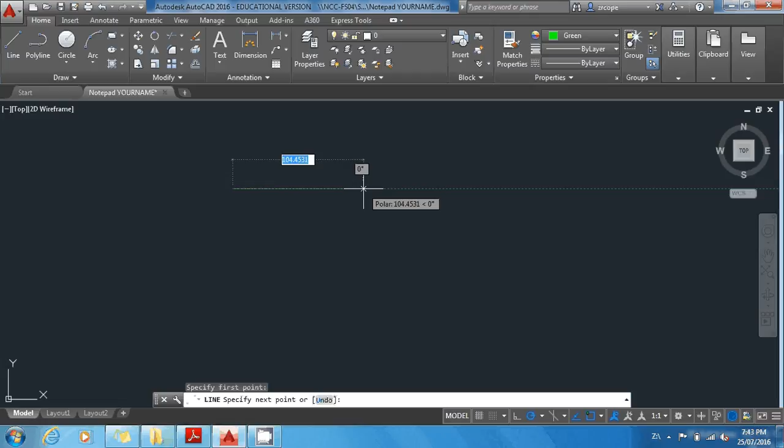We're going to start with a line. We're going to go over 230. Okay, it's green. We don't want that to happen, so let's delete that. Let's change that back to by layer. There you go. 230 by 120 by 230, and click to connect. Then hit enter.

Okay, the next task that we want to do is draw these blue lines, which are our bend lines. So let's start at the left side. It's 10 and then 20. So we're going to use this tool here called offset. Once you click it, at the bottom it says the distance. Click in the box and type in the first distance. Let's check. So we need 10. 10, enter. Select the left side, move in, and click again.

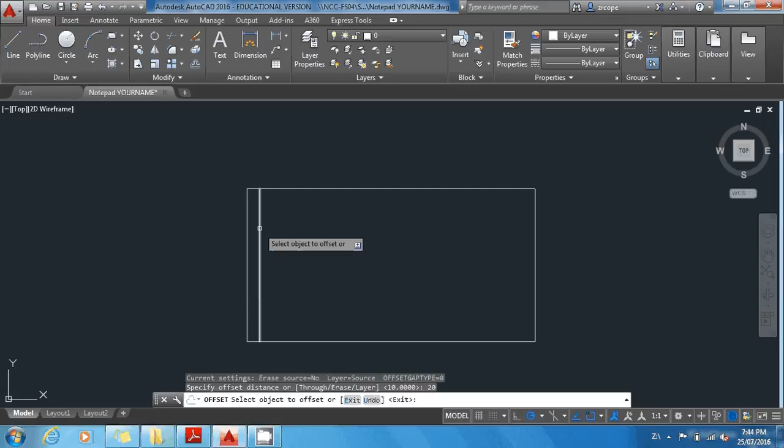Notice if I move to the left or right, I can pick what side it goes into. Okay, hit enter to finish. Let's do this again. Offset, pick the distance of 20, enter, pick the line we want to copy, and move to the left or right, and then click again. Hit enter to finish. Let's repeat again.

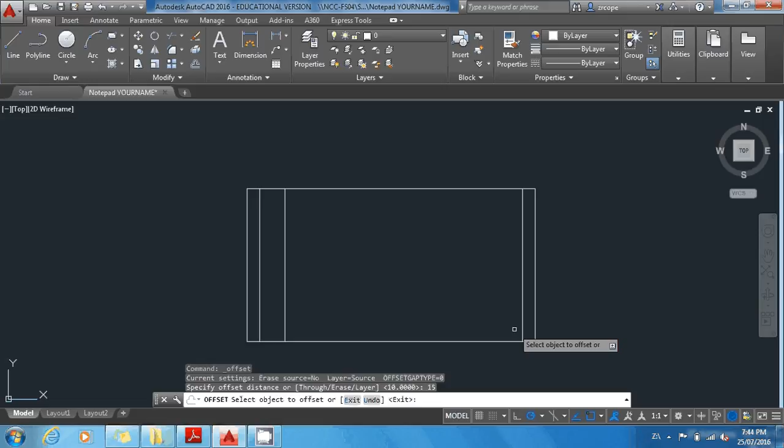On this side, we want to go 10 and 15. Offset, distance of 10, click, click again, offset, distance of 15, click, click again, then hit enter.

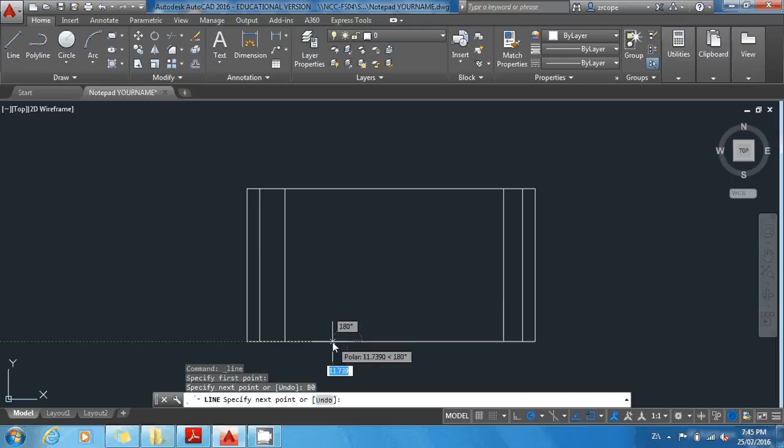Our next task is we want to curve the lines. Well, actually, let's not do that yet. Let's first make the inside piece. So this is the inside piece. So we need to go over a distance of 80 along the bottom and up a distance of 50 to get to this point. So I'm going to draw a new line. I'm going to start here. I'm going to go over a distance of 80, enter, and now my mouse is at the right spot, so I can go up a distance of 50.

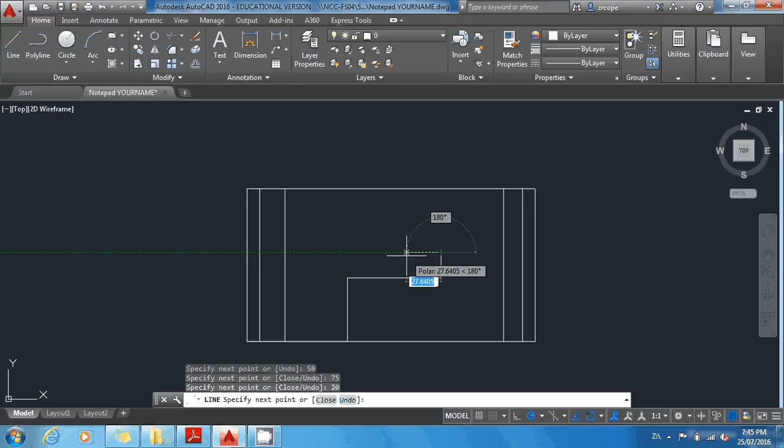Okay, now I'm going to go over a distance of 75 and up a distance of 20. So 75, go up 20, over 75, and back down. Now I can click to delete that line, and click this line and delete that line.

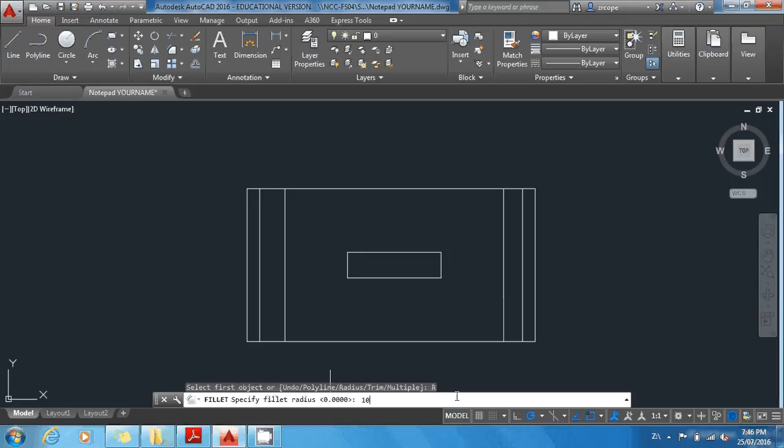Alright, let's curve the corners next. So that's going to be using the fillet tool. So the fillet tool is located here. You'll see fillet that curves corners. At the bottom, you need to specify the curve. So we click on radius and then type in a distance of 10 and hit enter. Now you have a square mouse. You can click the first line and the second line, and that curves the corner.

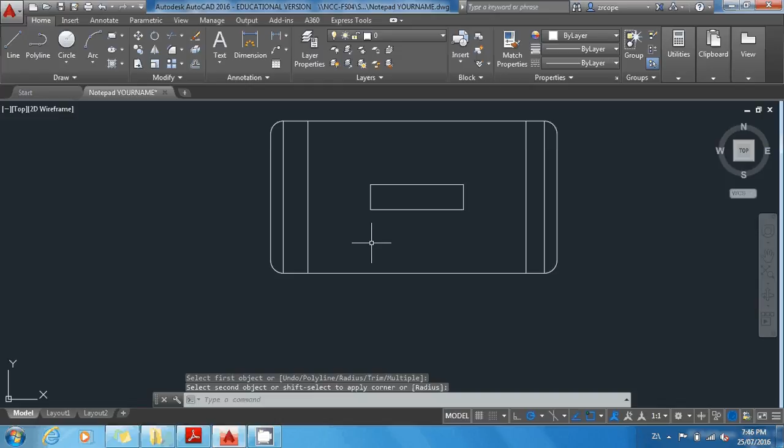So let's try again. Fillet, radius, 10, enter, click, click. Alright, we're going to repeat again. This time it remembers what you've done, so you can just keep clicking. Fillet. Okay, next task. Now I need to curve these corners. Those are a fillet of 5. Fillet, radius, 5, enter. Pick each line.

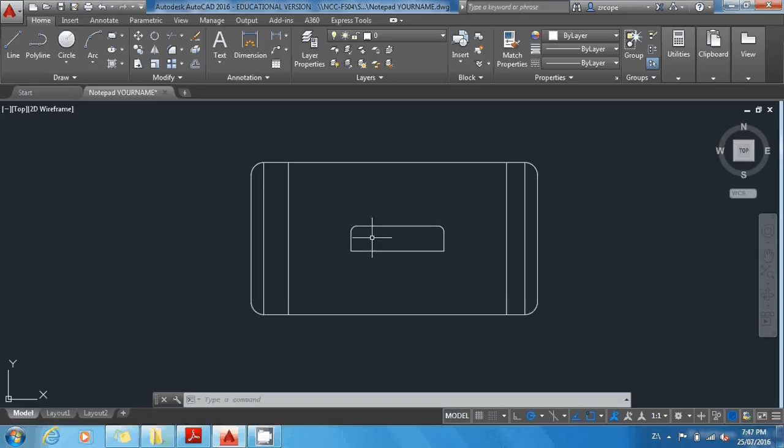Alright. Now we're going to add holes, the diameter of 4.7. Now they need to go in and up. So in 7.5, up 7.5. So we're going to start with our line tool. Start here, go in 7.5, go up 7.5, and hit enter. Okay, we're going to do the same from the other side. Over 7.5, up 7.5.

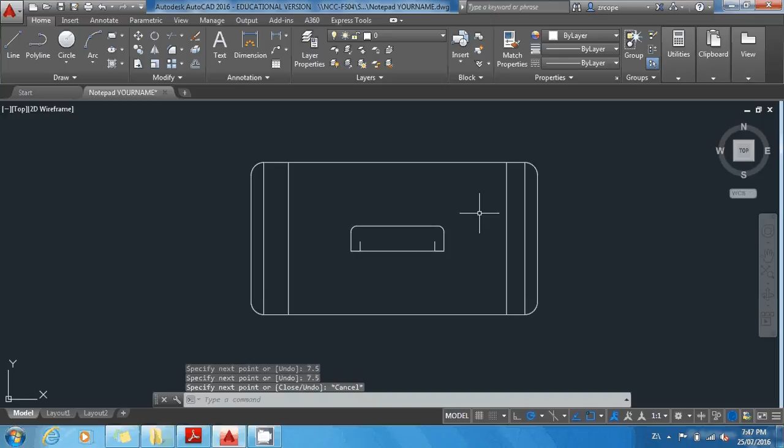Okay, then we can use circle. We want the diameter. 4.7 and hit enter. Okay, let's do that again. Click that. 4.7, enter. Okay, we can delete out our lines.

Alright, your next task now. Now what we need to do is add more circles here. So you're going to go over 52 and up 30. Line. Okay, this one's tricky. We don't have any corner. So what we can do instead, we can start in the middle. So we can go over 52 and then halfway up and halfway down. So the distance is 60. So that's 30 up, 30 down.

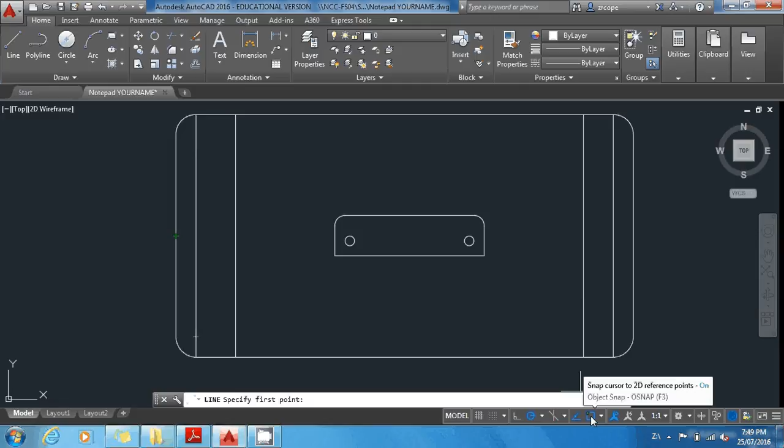Okay, to find the middle of something, which is the triangle, you need to click on the drop down arrow next to snaps and select midpoint. Make sure it's checked. Now if this is not blue, click once to turn it back blue. So it must be blue.

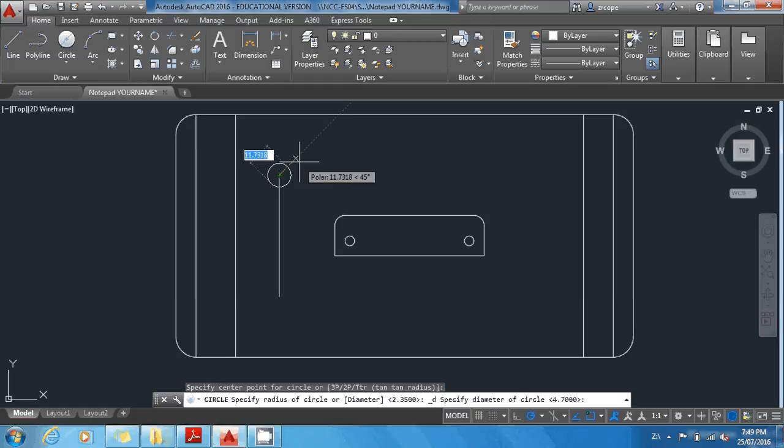Now click on the line, go over 52, hit enter, go up 30, enter, down 30, hit enter, delete this line out. Next we'll add in 2 circles, 4.7, enter, 4.7, enter. I'm going to delete that line out.

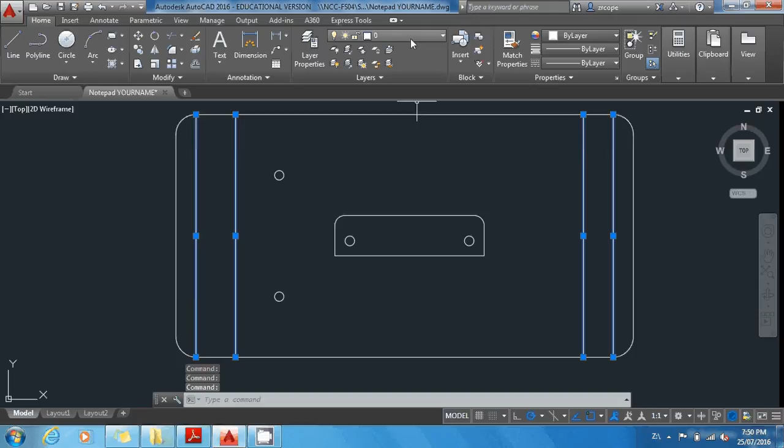Alright, you've just made the part. Now we need to change these line types. So click each line and change the layer. We want these ones as hidden detail. Okay, and then hit escape on your keyboard.

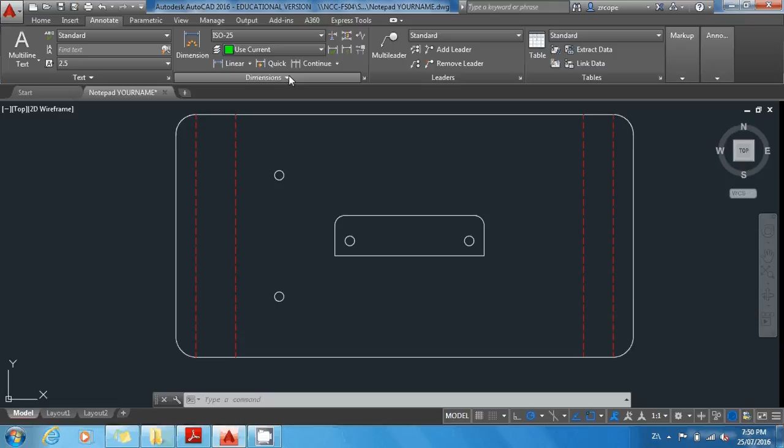The next task, we want to add little center lines for these. So go to annotate at the top. Actually first, let's change our layer to center lines. Now go to annotate, drop down this little box here, and there's your center mark. Click center mark, click on each circle. Notice it's too big. We're going to delete that or undo it.

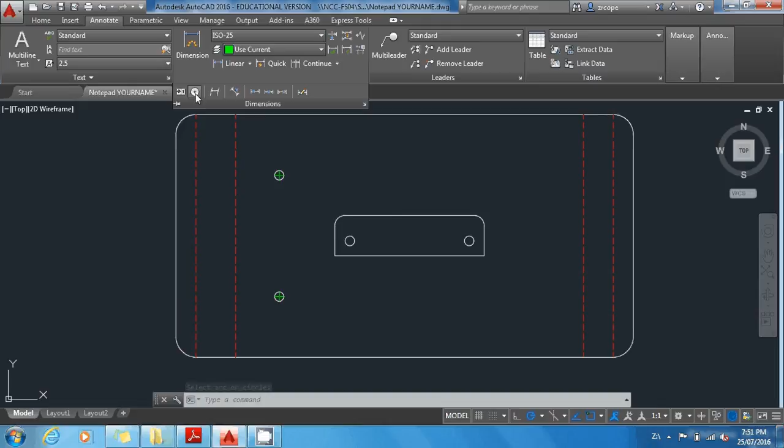And let's change the size of the dimensions. So we need to type in dim scale at the bottom and hit enter. Type in 1 and hit enter. Now you can go and select the circle marks and it comes in the right size. Alright, we are almost done.

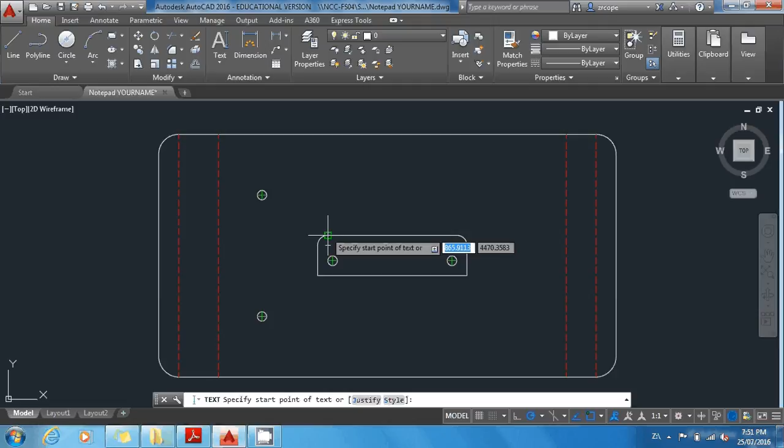Now, the last thing that we need to do is add our name. So we're going to switch our layer back to 0. We're going to use text, and let's use single line text. It says pick the start point. So we'll start here, pick a height. We're going to move our mouse up, which is how high we want our text. Click. Then move your mouse sideways, so we're going to the right, and click again.

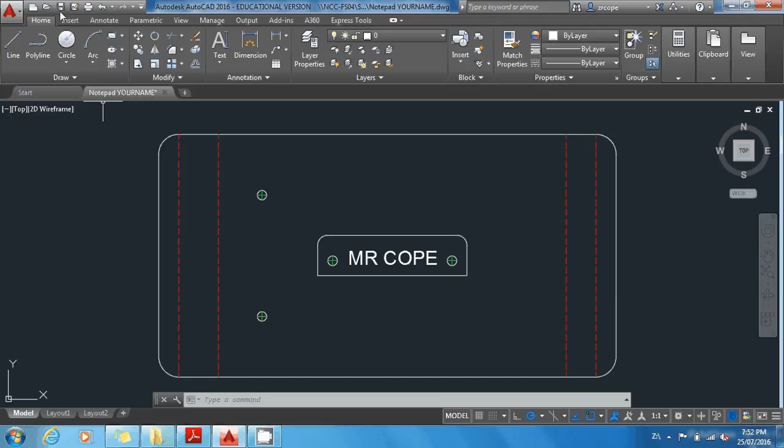Now I can type in my name. If it doesn't work the first time, just hit escape and undo it and try again. So once that's done, click outside and then click escape on your keyboard. And that is it. You've just completed your Notepad. The next tutorial will show you how to add dimensions. So let's save our Notepad, and now you're done.